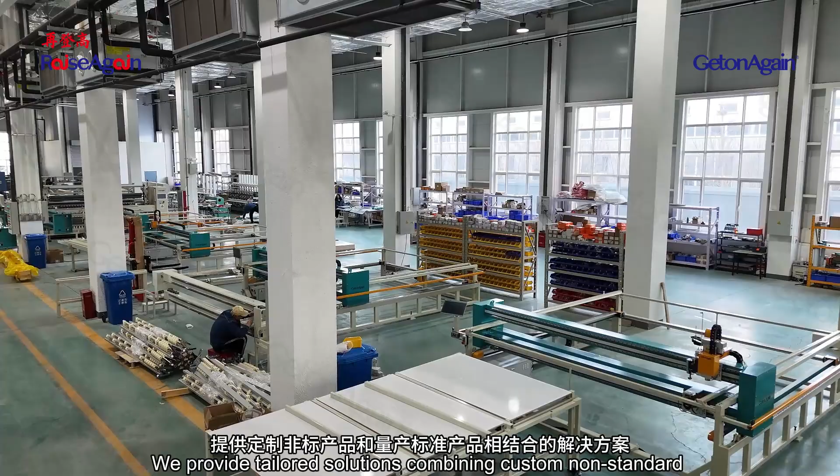We provide tailored solutions combining custom non-standard products with mass-produced standard products, including mechatronic machines, automated production lines, and intelligent factory solutions. Pattern room equipment includes magic inkjet plotter, 2 cartridge with maximum printing speed at 110 square meters per hour.

4 cartridge with maximum printing speed at 200 square meters per hour. Vertical inkjet cutting plotter, 1 machine multiple functions, pattern drawing with cutting, or standalone drawing. High-quality rotary cutting knife can cut minimum 80 grams per square meter paper for sample design, cost saving.

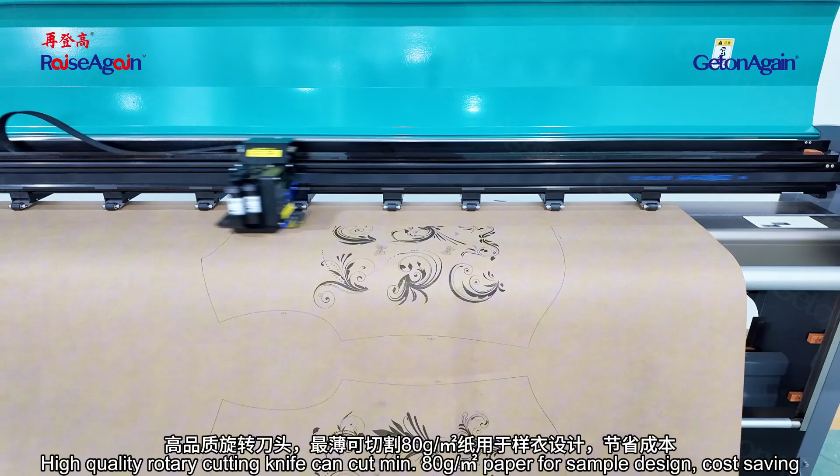Flatbed inkjet cutting plotter, both bitmap printing and cutting function, suitable for personalization, configured with long knife or short knife, and optional fixed knife sleeve or elastic knife sleeve, suitable for cutting various materials.

Digitizer, easily reading paper patterns, convenient positioning, simple operation, accurately reading patterns, enable to speed up the design. It is a powerful tool for traditional manual drawing digitization. Digitizer can be used in various fields, such as clothing industry, fashion design, surveying and mapping, mining, stamping and environmental protection, etc.

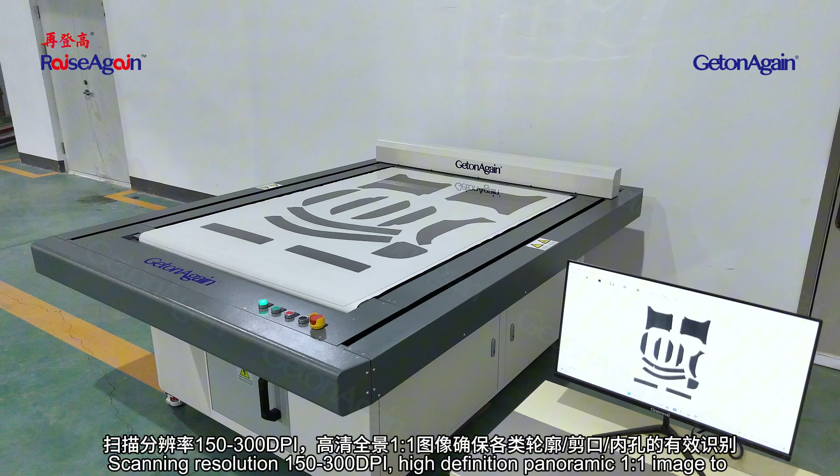Flatbed scanning digitizer. 1 button to start after placing scanning pieces. Can vacuum absorption auto scanning auto transmission. According to different models, support ultra-long width scanning. Scanning speed up to 7,200 mm/minute. Scanning resolution 150 to 300 dpi. High definition panoramic 1:1 image to ensure effective identification of various contours, notches, inner holes.

Cutting equipment includes automatic spreading machine. Easily set the spreading method, length, speed, quantity and sections, with intuitive as well as simple operation. Dual use for both knit and woven fabrics, suitable for t-shirts, children's clothing, loungewear, and toy textiles.

Automatic spreading machine, suitable for automatic fabric spreading of seats, bags, outdoor furniture and medical supplies, for working with heavy fabric roll. Smart cutting device. The intelligent adjustable cutting device allows for adjustable speed and distance, ensuring neat and stable cuts. Cutting unit and main unit can be quickly and easily detached or attached.

Fabric pre-relaxation device releases fabric tension in advance before spreading, eliminating spreading tension and maintaining consistency in spreading quality. Automatic edge alignment device ensures accurate automatic edge alignment during the spreading process, enhancing the quality of the spread fabric. Emergency stop device. Steel cables are installed on both sides of the cutting table, allowing for an emergency stop by pulling the cable from any position on the table, ensuring operational safety.

Easy to be operated by 1 person, effective spreading and smoothing. With servo system, auto tension adjustment for fabric. Edge alignment accuracy within 0.5 mm.

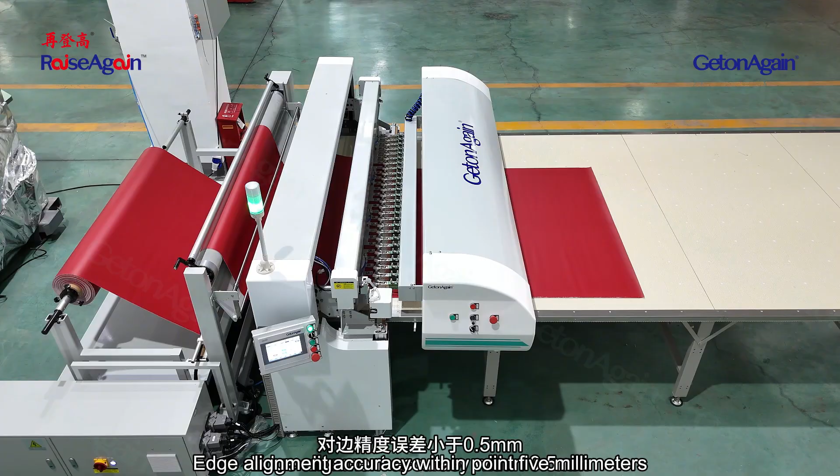Automatic spreading machine, 2 to 6 rolls, suitable for automatic fabric spreading of seats, bags, outdoor furniture and medical supplies. Fabric pre-relaxation device releases fabric tension in advance before spreading, eliminating spreading tension and maintaining consistency in spreading quality. Smart cutting device. The intelligent adjustable cutting device allows for adjustable speed and distance, ensuring neat and stable cuts. Cutting unit and main unit can be quickly and easily detached or attached.

Automatic edge alignment device ensures accurate automatic edge alignment during the spreading process, enhancing the quality of the spread fabric. Independent fabric rack, up to 6 rolls of fabric can be operated at the same time. Flexi spread device, flexible fabric clamping structure, simulating manual fabric clamping. Auto sensing fabric spreading tension, eliminating fabric curling problem due to excessive tension during spreading.

Automatic stop when material runs out. Automatically stops operation when the fabric is finished spreading and returns to its starting point.

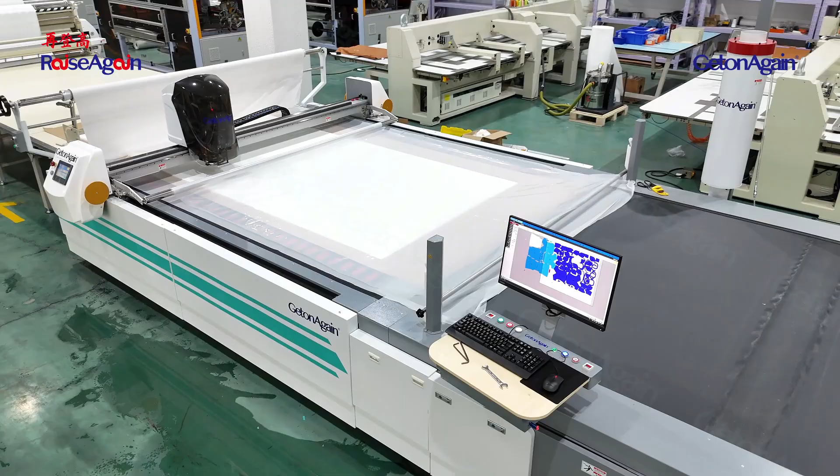Automatic multi-layer cutting machine. Through the combination of micron-level intelligent sensing components and an intelligent control system, dynamic compensation and correction of cutter deformation during cutting operations are achieved, significantly reducing errors between the top and bottom layers of fabric during cutting, enabling truly high-precision intelligent cutting.

Automatic single-layer cutting machine. No need to create specialized cutting molds. Cutting can be performed precisely by directly importing CAD design drawings into the equipment. Optimizes cutting paths, integrates repeated cutting lines, allows for pre-simulation of the cutting process, and supports continuous cutting for extra-long materials.

Stripe and plaid matching cutting machine, equipped with a few HD industrial cameras, according to the capture size to perform intelligent combination, ensuring high-accuracy fabric image capturing.

Stripe and plaid matching auto cutter, equipped with double knives and pen draw punching working mode, special for various stripes and plaids fabric cutting in single ply.

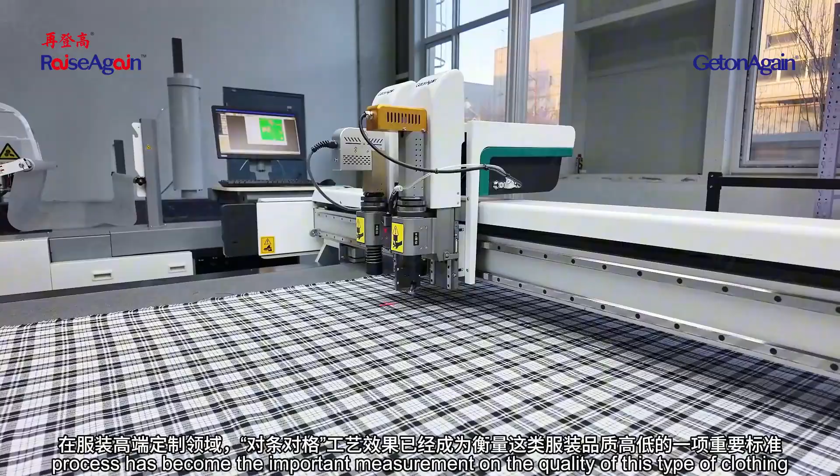High-end clothing customization. The effect of the alignment match stripe and plaid process has become an important measurement of the quality of this type of clothing. Stripe and plaid auto cutter is the equipment specially developed for this process to meet matching stripe and plaid clothing, suitable for single ply cutting.

Process of striped plaided fabrics.

Precision single head cap, tubular embroidery machine. Pattern rotation and proportional scaling. Patterns can be scaled up or down in 1% increments, ranging from 50% to 200%, and rotated in equal increments, with a rotation range from 0 degrees to 89 degrees.

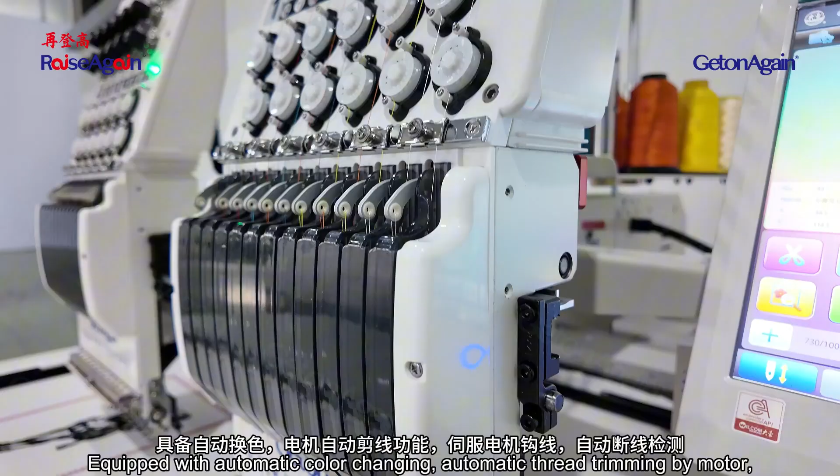Precision two-heads cap, tubular embroidery machine, equipped with automatic color changing, automatic thread trimming by motor, servo motor thread hooking, and automatic thread broken detection.

6-head flat embroidery machine, used for high-end customization of clothing, bags, shoes, hats, toys, and other products.

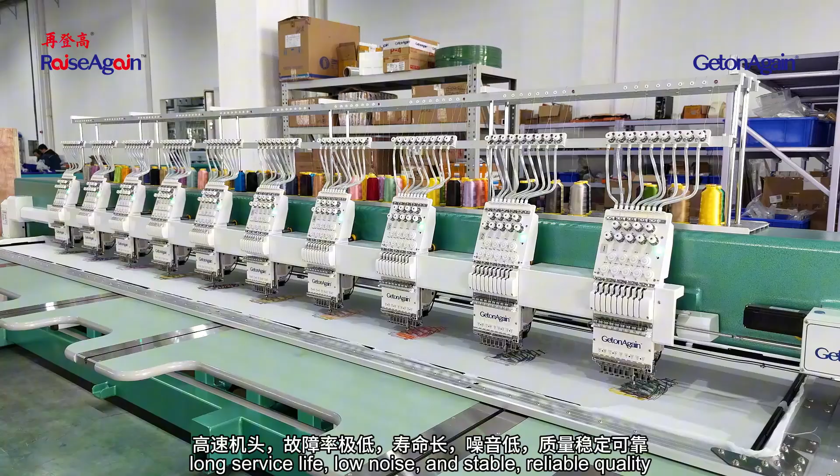Computerized embroidery machine: high-speed embroidery with extremely low failure rates, long service life, low noise, and stable, reliable quality. Equipped with an upper thread clamping device to prevent thread detachment and breakage, ensuring excellent embroidery results. Suitable for textile and garment manufacturing, footwear, hats, bags, home decoration, automotive interiors, and industrial products.

Embroidery equipment includes the Cloud Smart Teaching Embroidery Machine, suitable for integrated theoretical and practical teaching of computer embroidery in fields such as fashion and apparel design, clothing design and its engineering.

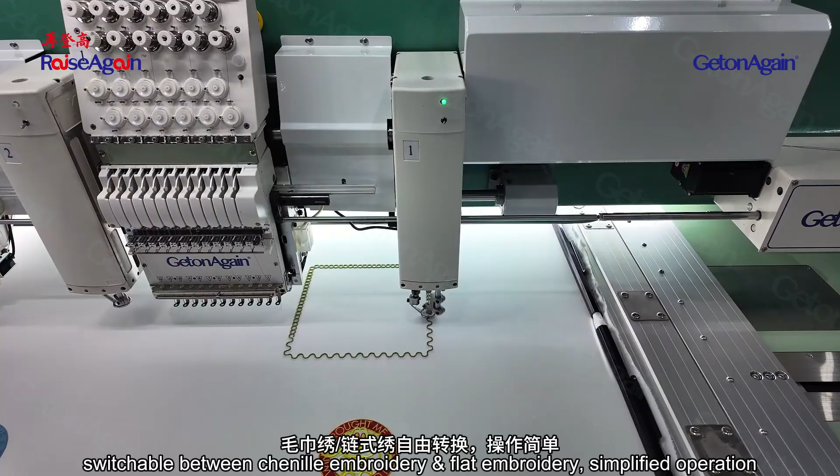Mixed chenille chain stitch embroidery machine. Mixed embroidery feature, according to color sequence settings, switchable between chenille embroidery and flat embroidery, simplifying operation. Chenille needle height can be adjusted in 10 levels according to chenille pile height or chain stitch thread thickness. Multifunctional embroidery on garments, shoes, caps, home textile, toys, bags and luggage, art craft, etc.

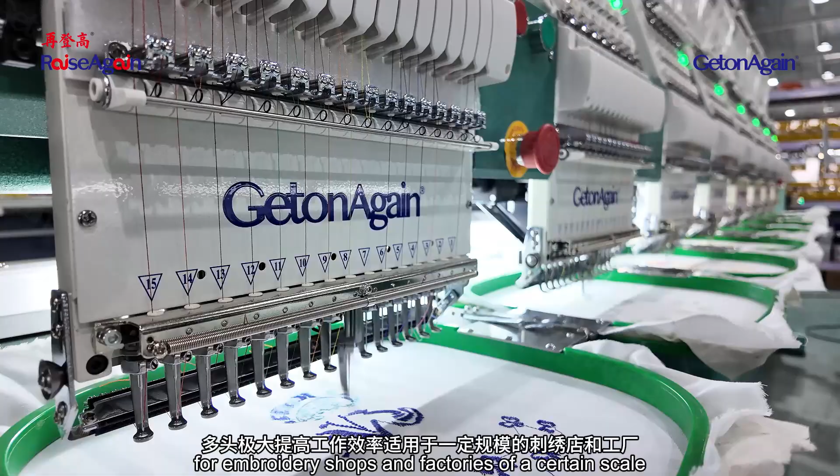Multi-head tubular embroidery machine, multi-head series, suitable for embroidering on flat items, caps, garments, shoes, belts, bags, etc. Auto thread trimmers, auto color change, auto thread break detection, 270 degree wide angle cap system, red light locating, LED lighting, precise head and drive system to ensure exquisite embroidery work, drop tables easy to lift up and down. Multiple heads greatly improve work efficiency, suitable for embroidery shops and factories of a certain scale.

Computerized 5-in-1 embroidery machine, integrating 5 functions in one machine: flat embroidery, coiling, cording embroidery, chenille, chain stitch embroidery, double sequin device, and laser cutting function. High precision, strong stereo sense, ideal artistic effect, suitable for embroidery of apparel, home textile, furniture, teaching, design and arts and crafts, etc.

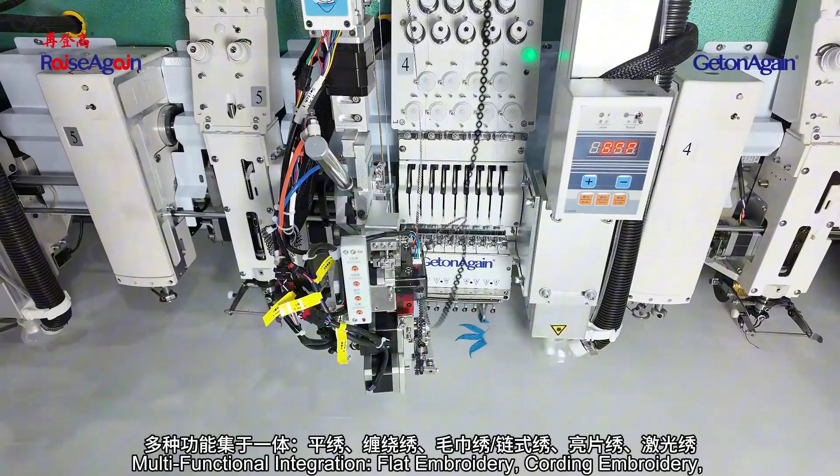Computerized mixed embroidery machine, multifunctional integration: flat embroidery, cording embroidery, chenille, chain stitch embroidery, sequin embroidery, and laser embroidery. Expandable options support additional modules such as laser processing. Fast switching between flat embroidery, coiling embroidery, or chenille embroidery, allowing you to choose any embroidery type as needed. Applications: suitable for embroidery on garments, home textiles, home decor, education areas, R&D and arts and crafts products.

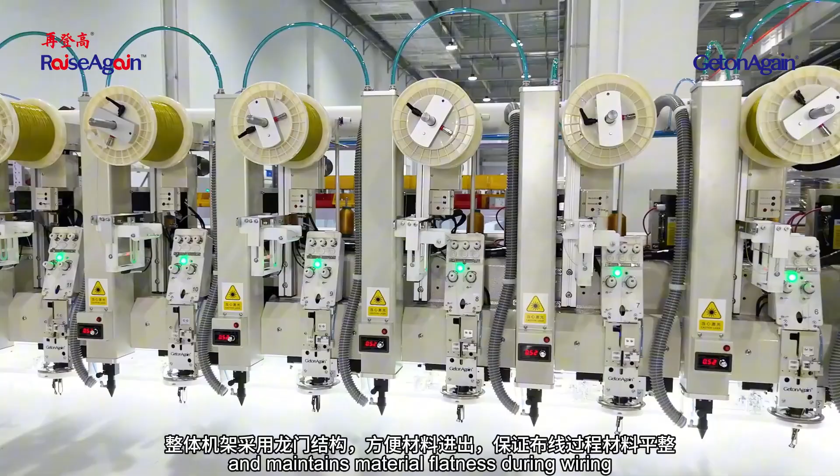Computerized wiring machine Model G. Gantry frame design ensures easy material loading, unloading, and maintains material flatness during wiring. Large spool device reduces heating wire replacement frequency during production. Automatic wire feeding device for resistance wire or other wires, with adjustable feed amount and feed fault alarms.

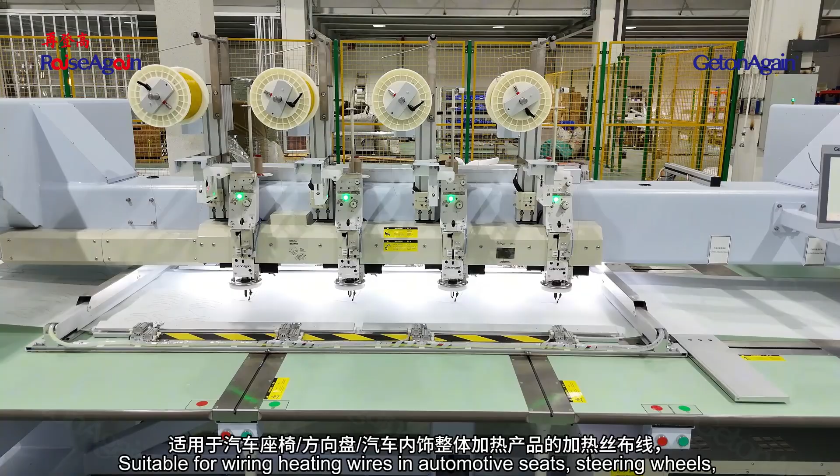Automatic product changeover. Raw fabric feeds in from one end. After wiring, the automatic take-up device pulls the material with adjustable lengths, reducing manual pulling time and labor. Pneumatic frame: program-controlled pneumatic components for automatic opening, closing, and tensioning. Firm clamping with adjustable stretching lengths within a specified range. Suitable for wiring heating wires in automotive seats, steering wheels, and complete interior heating products, also applicable for automotive hands-off detection hot product wiring.

Carbon fiber placement stitching machine. Suitable for the layup and stitching of carbon fiber materials in industries such as automotive, aerospace, and bicycle manufacturing. Enables precise features and independent feeding paths for carbon fiber, significantly reducing fiber abrasion and ensuring material integrity, enabling highly accurate stitching of carbon fiber fabrics.

Stitch width can be set according to different material specifications. The presser foot height can be set and automatically adjusted during the carbon fiber placement and stitching process to accommodate different material thicknesses.

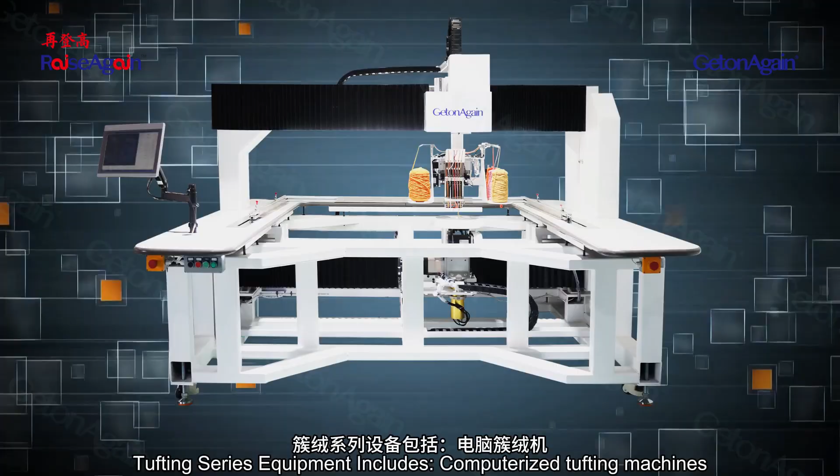Tufting series equipment includes computerized tufting machines with a rotary tufting head at any angle, avoiding positive-negative stitching difference for higher efficiency and better tufting results. Suitable for various rugs, carpets, hanging carpets, tapestry, etc., and other flooring decorative and home furnishing products tufting.

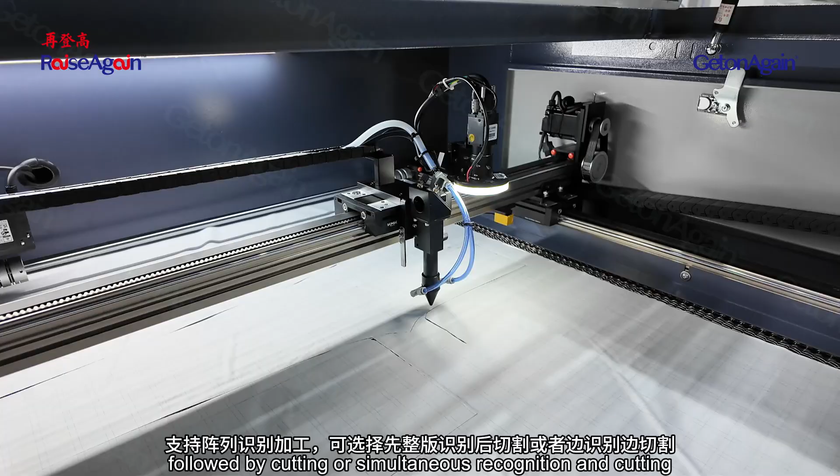Laser equipment includes small format camera positioning laser engraver cutting machine, supporting array recognition processing, with options for full sheet recognition followed by cutting, or simultaneous recognition and cutting. Features multi-template mixed cutting, allowing recognition and positioning of different patterns to be completed in a single operation.

Laser engraving and cutting machine. The cutting center can directly and seamlessly interface with software such as AutoCAD, CorelDRAW, AI, and Garment CAD, ensuring easy operation, high cutting precision, and fast cutting speed. Suitable for clothing, home textiles, furniture, luggage, toys, car interiors, shoemaking, and other industries for cutting and carving of non-metallic materials.

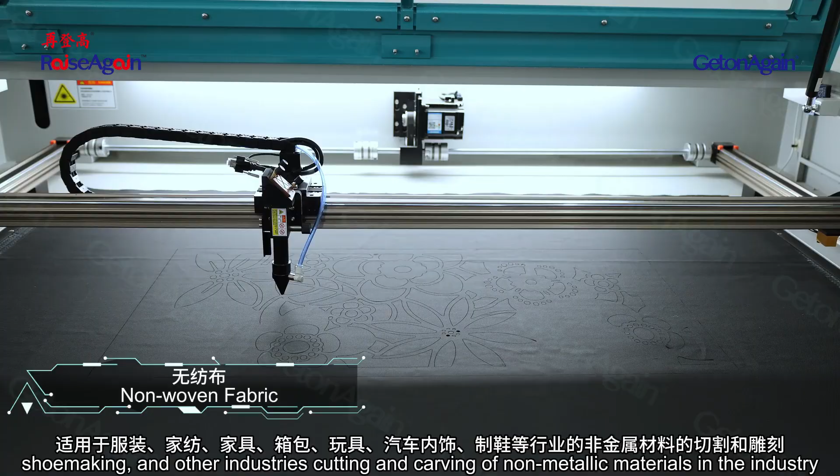Automatic feeding laser cutting machine, large format vision recognition plus auto receiving table. Advanced vision system with high resolution industrial camera captures real-time images of material patterns, accurately detecting outer contours to perform precise cuts, resolving issues such as distortion in printed or stretch fabrics.

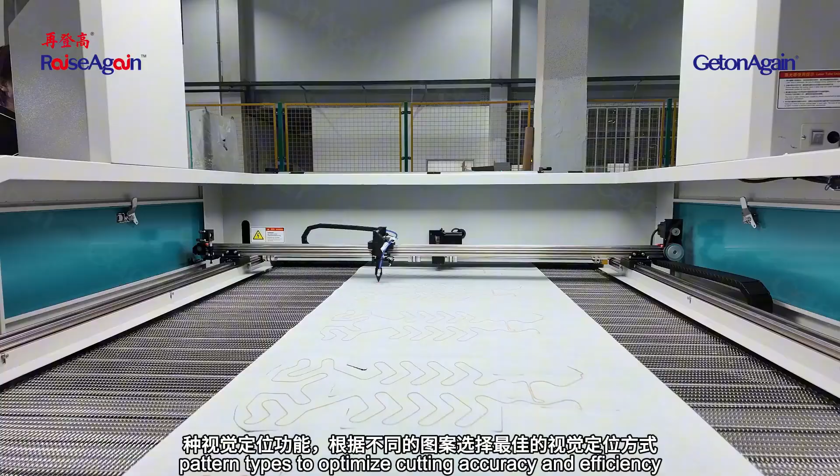Choose the most suitable positioning mode for different pattern types to optimize cutting accuracy and efficiency. Supports edge alignment and tension control to ensure smooth, wrinkle-free material feeding. Highly automated, ideal for continuous production. Designed for precise, high-efficiency cutting of flexible materials such as digitally printed fabrics, lace with pattern alignment and shaping cutting, and heating elements with positioning requirement.

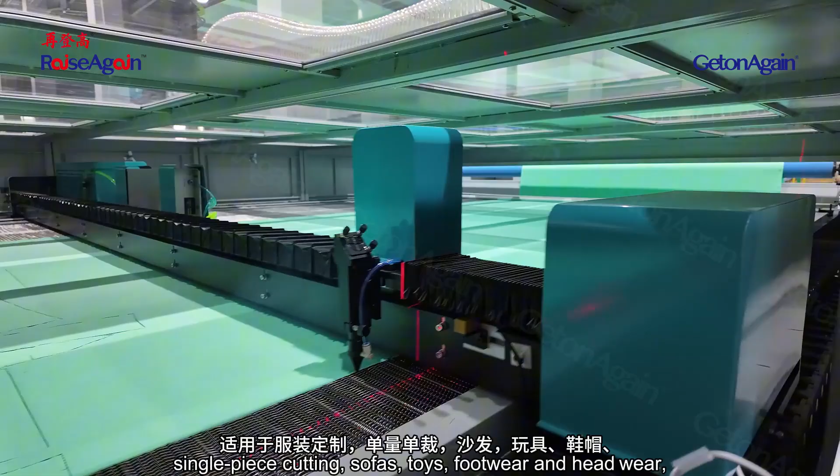Fully automatic large format laser cutting machine with inkjet device. Large format automatic feeding system, designed to meet the requirements for feeding and cutting whole rolls of fabric. Inkjet and cutting functions integrated for enhanced versatility. Applicable to industries such as custom clothing, single-piece cutting, sofas, toys, footwear and headwear, textile print pattern positioning cutting, automotive interiors, industrial filtration, and advertising, etc.

Sewing equipment includes automatic arbitrary rotary single-needle leather sewing machine, suitable for automated leather pattern sewing in the fields of automotive interiors, car seat covers, car door panels, airplane seats, and leather furniture upholstery. Brand new integrated sewing head design, simple and elegant overall appearance.

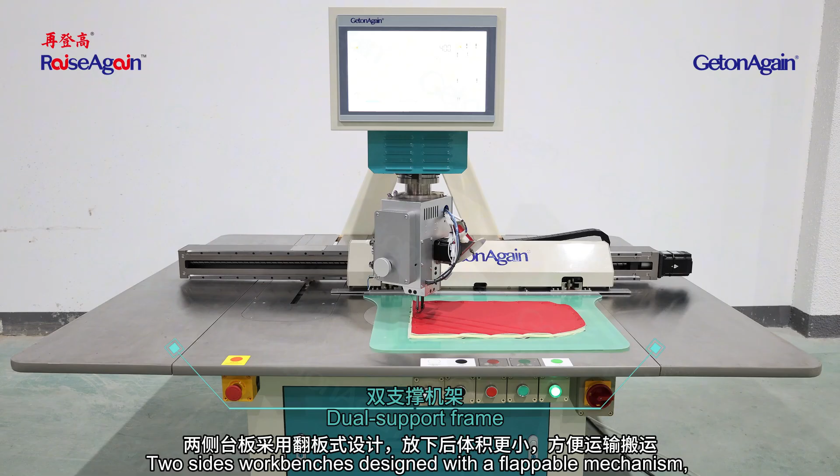15-inch HD industrial touch control screen. Two-side workbenches designed with a flappable mechanism, reducing size after folding for easier transportation. Sewing head can rotate at any angle, avoiding differences between forward and reverse stitches, improving sewing efficiency and stitch quality. Pneumatic lifting head structure with a stroke of 50 mm, making frame changes and span sewing more convenient.

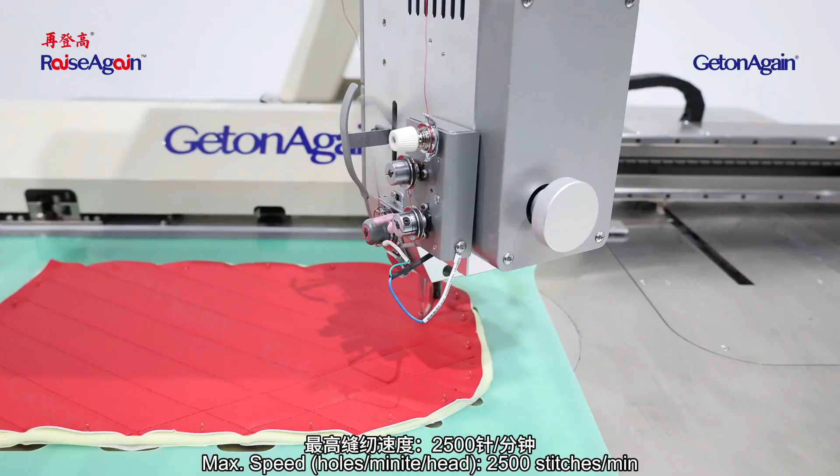The advantage of an independently driven presser foot system lies in its ability to control presser foot height through real-time pattern programming, effectively addressing uneven presser foot pressure issues when sewing materials of varying thicknesses. Newly upgraded triple lead screw drive for higher dynamic positioning accuracy. Max speed holes/minute/head, 2,500 stitches per minute.

Fully automatic 360 degrees template sewing machine with auto feeding. Ideal for automated sewing of thin, thick materials including quilted garments, down jackets, pillowcases, etc. Dual auto feeding system enhances efficiency and reduces operator fatigue.

Vertical head lift for easy template replacement and convenient step-over sewing. Reinforced casting body ensures consistent stitches even at high speeds, no head sinking. Smart functions include auto thread trimming, upper thread break detection, bobbin counter, USB pattern import, and top thread clamping.

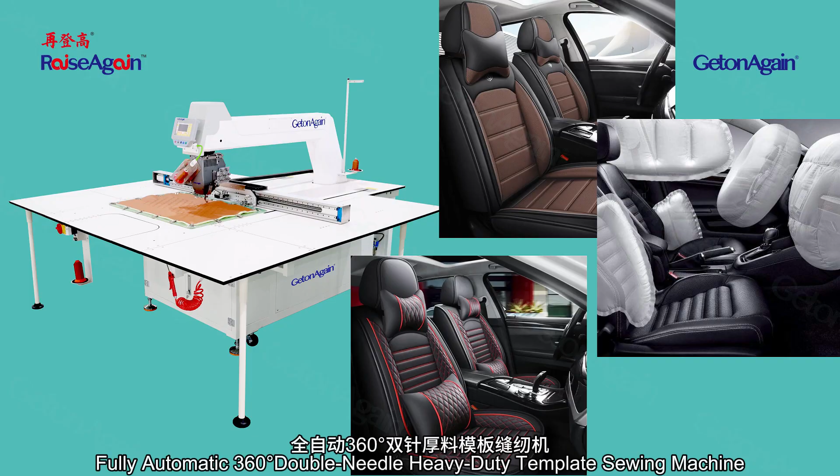Fully automatic 360° double needle heavy-duty template sewing machine, for automotive seats, automotive airbags, automotive interiors, home furnishings, and other double-thread heavy-duty sewing. Features include automatic thread trimming, emergency stop, thread breakage detection, bobbin thread counting, data input saving, and automatic adjustment of sewing direction. Fully servo motor control ensures high equipment stability and guarantees high-quality sewing results.

Mattress border pattern sewing machine. Pneumatic presser frame securely holds fabric in place for more beautiful stitching and allows for wide-range horizontal frame movement. Machine head with micro-oil head design ensures fabric remains free from all contamination during sewing. Pneumatic positioning device guarantees high-precision alignment at panel joints.

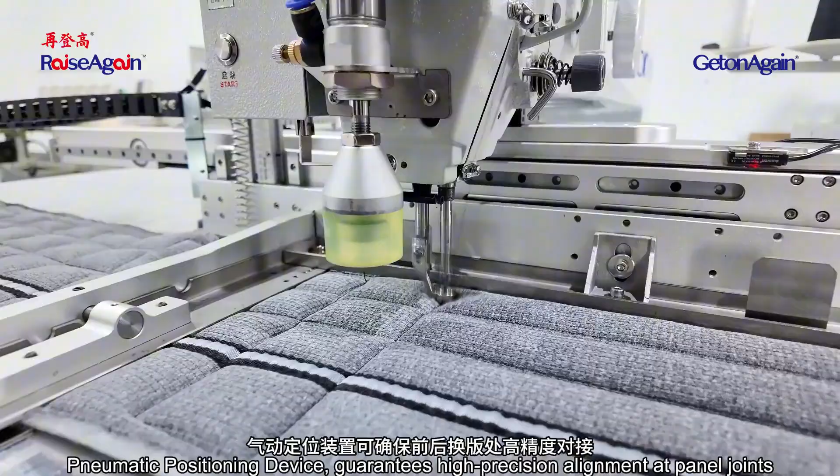Features automatic thread trimming, automatic material collection, and machine error alarm for ease of operation. Standard configuration with feeding and collecting racks for streamlined workflow. Advanced sewing technology for mattress side borders. Fully automatic perforation and sewing integrated machine.

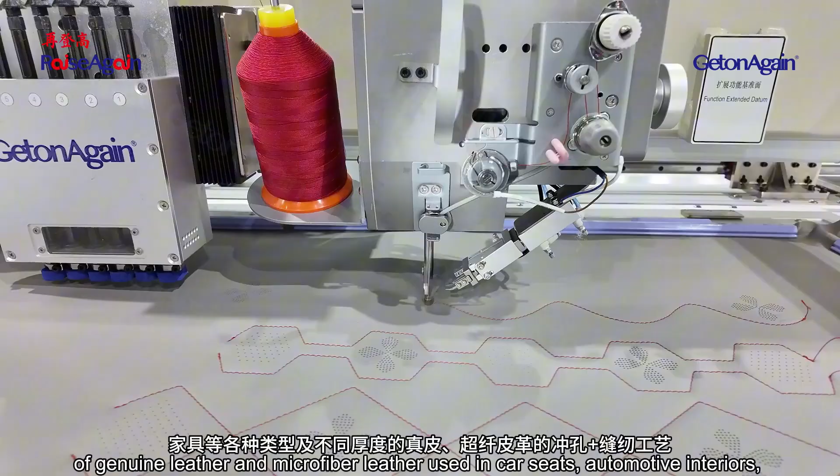Punching machine head is specifically designed and developed for leather materials, equipped with various round punching tools specifications. Sewing head up moving stroke is 50 mm, providing sufficient space for material loading and easy operation. Suitable for perforation and sewing processes of various types and thicknesses of genuine leather and microfiber leather used in car seats, automotive interiors, aircraft seats, luggage, furniture, and more.

Fully automatic embroidery and sewing integrated machine. 9-color embroidery machine head to meet the embroidery needs of different industries. The embroidery thread clamping mechanism incorporates a novel upper thread clamping assembly, effectively reducing thread breakage and slippage occurrences during operation. Specially designed sewing machine head for leather materials, producing beautiful stitching.

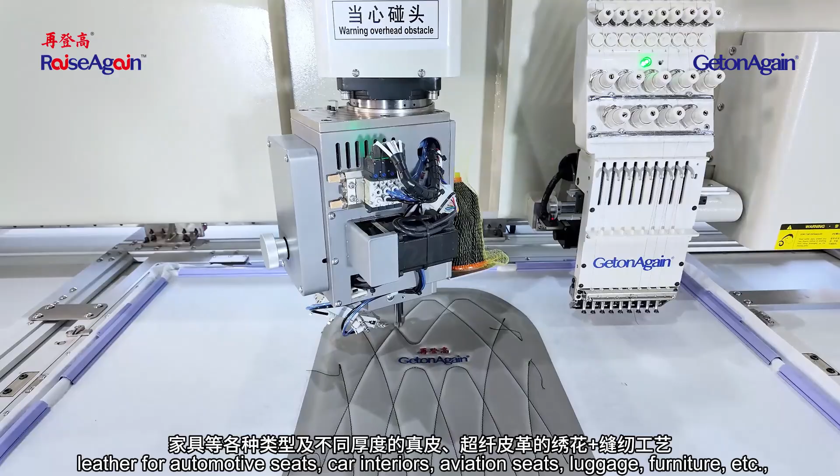Presser foot height is motor controlled and highly adjustable. Sewing machine head has up-down moving stroke of 50 mm, providing ample space for material loading and ease of operation. Suitable for various types and thicknesses of genuine leather and microfiber leather for automotive seats, car interiors, aviation seats, luggage, furniture, etc., combining embroidery and sewing processes.

Fully automatic perforation round hole and embroidery and sewing rotating head machine. Integrates punching, embroidery, and sewing into one machine, allowing for arbitrary patterns, design and seamless combinations of punching, embroidery, and sewing for complex processes. The 9-color embroidery head meets the embroidery needs of various industries.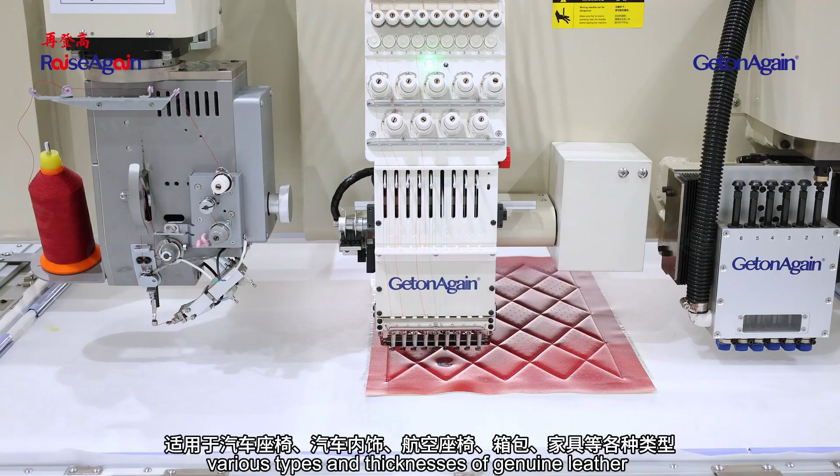Sewing machine head features an arbitrary rotation structure, creating beautiful stitching, reducing frame movement frequency, and improving efficiency. Suitable for punching, embroidering and sewing processes for various types and thicknesses of genuine leather and microfiber leather used in automotive seats, car interiors, aviation seats, luggage and furniture, etc.

Fully automatic round perforation and 9-color embroidery and fixed head sewing machine, Super M. Integrates punching, embroidery, and sewing into one machine, allowing for arbitrary pattern, design and seamless combinations of punching, embroidery, and sewing for complex processes. The 9-color embroidery head meets the embroidery needs of various industries.

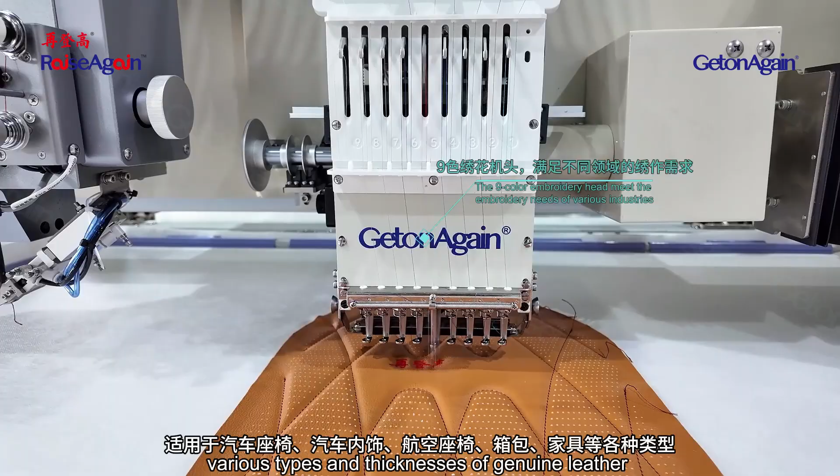Sewing machine head features an arbitrary rotation structure, creating beautiful stitching, reducing frame movement frequency, and improving efficiency. Suitable for punching, embroidering and sewing processes for various types and thicknesses of genuine leather and microfiber leather used in automotive seats, car interiors, aviation seats, luggage and furniture, etc.

Fully automatic perforation special hole and embroidery and sewing rotating head machine. Integrates punching, embroidery, and sewing into one machine, allowing for arbitrary pattern, design and seamless combinations of punching, embroidery, and sewing for complex processes. Specially developed punching machine head for leather materials. The 9-color embroidery head meets the embroidery needs of various industries.

Sewing machine head features an arbitrary rotation structure, creating beautiful stitching, reducing frame movement frequency, and improving efficiency. Suitable for punching and embroidering and sewing processes for various types and thicknesses of genuine leather and microfiber leather used in automotive seats, car interiors, aviation seats, luggage and furniture, etc.

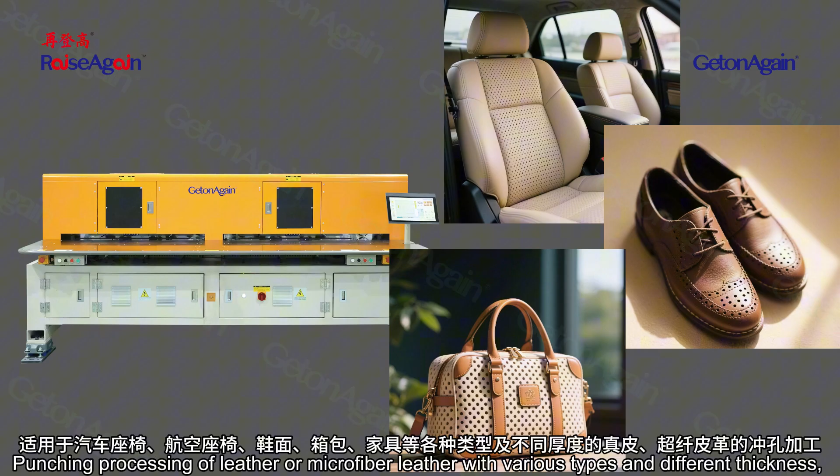Automatic high-speed leather perforating machine for punching processing of leather or microfiber leather with various types and different thickness, such as car seats, aviation seats, shoes, bags and furniture, etc. Full-scale 3-dimensional protective design ensures safer operation. The punch toolbox is tightened to prolong the punch tool's spring service life and reduce part wear.

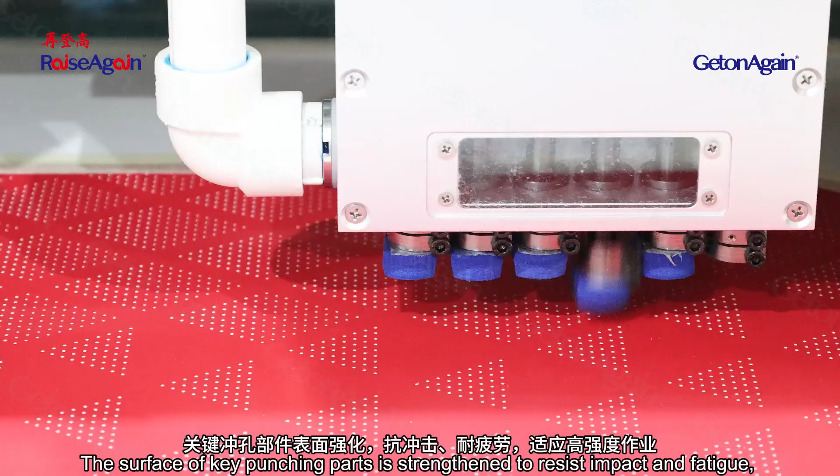The XY axis uses a ball screw direct drive for high-precision punching. The surface of key punching parts is strengthened to resist impact and fatigue, meeting the needs of high-intensity work. Single-head machines can make up to 2000 holes per minute, and double-head ones up to 4000.

Automatic template sewing machine, rotary head, heavy material. Both the X and the Y axis use a screw and slide transmission method, providing high precision and good stability. Suitable for pattern sewing on leather and heavy materials, such as car seats, sofas, massage chairs, coach interiors, and aircraft seats. The machine head can rotate freely to ensure the quality of the sewing stitches.

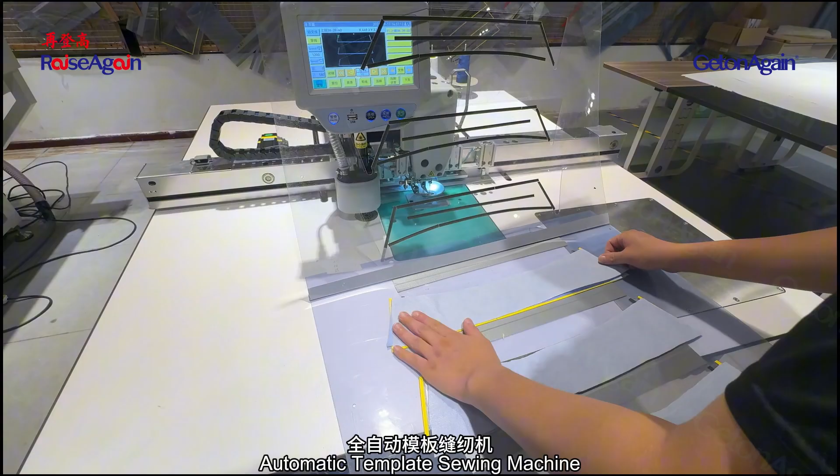Automatic template sewing machine. Double belt, double guide rail, double stepper motor structure. The machine head adopts oil-free lubrication, and the rotary shuttle adopts oil-line lubrication technology to completely eliminate fabric pollution. Identify patterns through RFID barcodes and automatically switch to the corresponding sewing program for quick sewing. Used for template sewing processes such as opening pockets, notches, bag covers, collar trimming, etc.

Pattern sewing machine. This machine can easily sew 1200D thick thread with a thickness of 12 mm, 2 times large rotary hook, automatic thread trimming, and the maximum sewing speed can reach 2500 RPM.

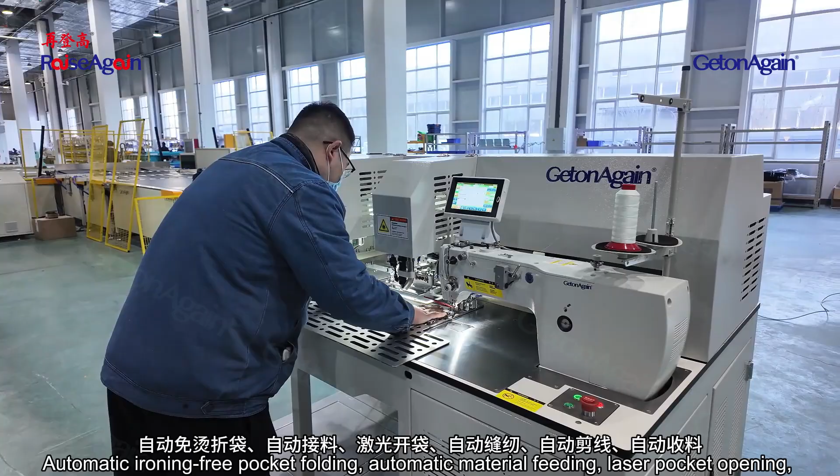Automatic laser pocket opening machine. Automatic ironing-free pocket folding, automatic material feeding, laser pocket opening, automatic sewing, automatic thread trimming, and automatic material collection. Front and back pockets for men's and women's clothing. Suits, inner and outer pockets of jackets, dress pants, hoodies, sun protection clothing, school uniforms, sportswear, cotton padded jackets, down jackets, workwear, jackets, uniforms, trench coats, cashmere coats, and plackets for polo shirts.

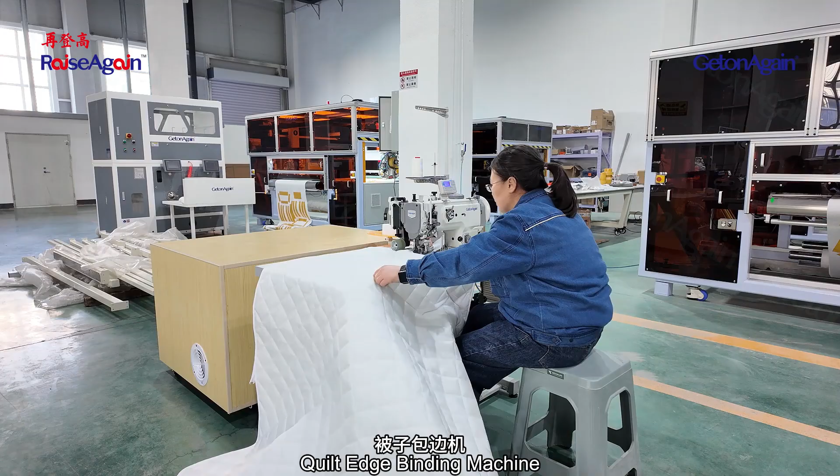Quilt edge binding machine. Features single needle compound feed, achieving cutting, binding, and sewing in one seamless operation. Enlarged right side waste discharge port with pneumatic waste discharge assistance ensures smoother disposal of waste generated during edge cutting. Special synchronized feeding structure, including alternating presser foot, needle, feed dog, and binding attachment, ensures no wrinkles or misalignment during straight line or corner sewing for a flawless binding effect.

Designed for edge binding processes of quilts such as cotton quilts, summer quilts, spring and autumn quilts, and other bedding items. Quilts, mattress binding with pulling sewing workstation. Equipment factory standard provides air floating table and automatic pulling device. Makes sewing worker operation easier and smoother.

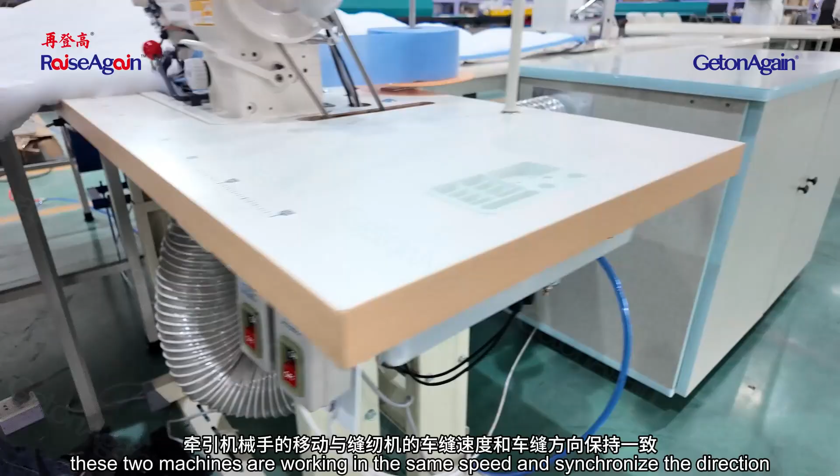Equipped with PLC control pulling device and synchronized with sewing machine electronic control. These two machines are working in the same speed and synchronize the direction. Optional automatic storage and vacuuming device to improve efficiency, reduce dust emissions, and provide the sewing operator a clean and tidy working environment. Binding result is rich with a strong solid feel. Corners are smooth and nice. Evenly stitched lengths, no hairy edge, no edge folding, no corner raising, etc.

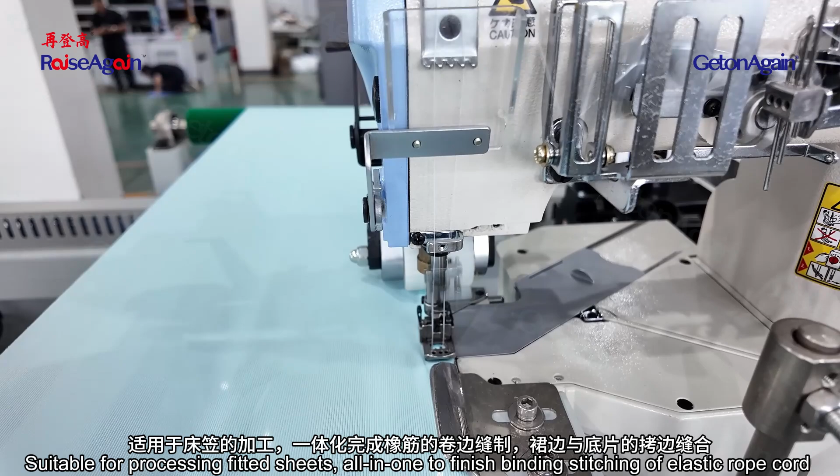Automatic mattress protector skirting sewing machine, interlock and overlock. Upper head with Pegasus interlock sewing. Lower head with Pegasus overlocking machine overlock stitches. High speed and stable performance. Suitable for processing fitted sheets. All-in-one to finish binding stitching of elastic rope cord and bed skirt, and the overlocking of bed skirt to mattress protector topper layer.

Automatic mattress protector skirting sewing machine, edge overlock. Upper and lower head with Pegasus overlocking machine overlock stitches. High speed and stable performance. The upper and lower workpieces work synchronously. Integrates the sewing of rubber band, banding and the sewing of bed skirt to the mattress protector layer, all finished in one.

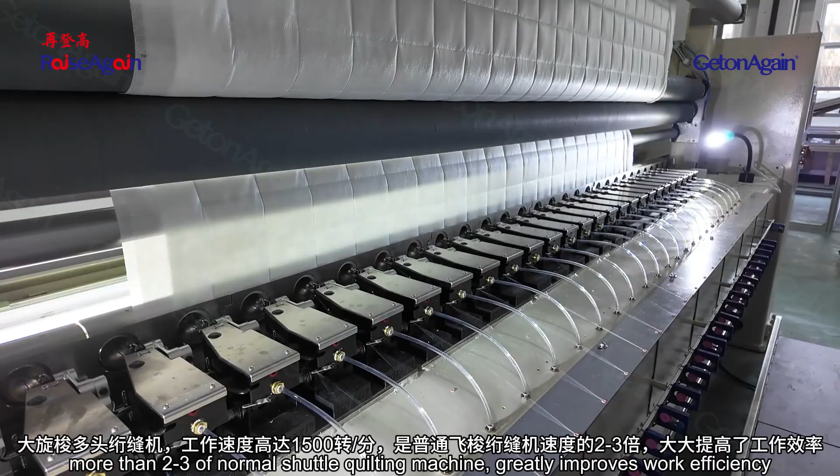Quilting equipment includes computerized multi-head rotary hook quilting machine model and double row lock stitch multi-head quilter with large rotary hook. Max speed of 1500 RPM, more than 2 to 3 times of normal shuttle quilting machine. Greatly improves work efficiency. 3-fold capacity rotary hook, less bobbin changing frequency. Beautiful stitches, no lost stitch, no thread loops.

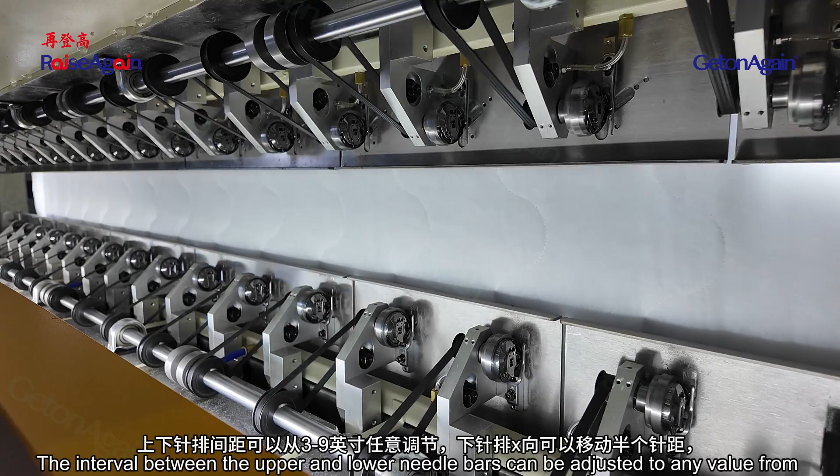Computerized multi-head rotary hook quilting machine model E, 5-time jumbo rotary hook, less bobbin changing frequency. Beautiful stitches, no lost stitch, no thread loops. The interval between the upper and lower needle bars can be adjusted to any value from 3 to 9 inches. The lower needle bar can move half a needle pitch in the X direction, so that quilting needle bars of different sizes and patterns can be combined, especially for some non-standard size patterns, which can achieve a unique effect.

Computerized multi-needle shuttle quilting machine, flying shuttle, for quilting of fitted sheets, bed covers, summer quilts and clothing products with quilting pattern. Computerized multi-needle chain-stitch quilting machine. Servo motor-driven rollers and lead screws ensure precise quilting patterns, suitable for mattresses, mattress covers, sofas, bedding, home textiles and home decor.

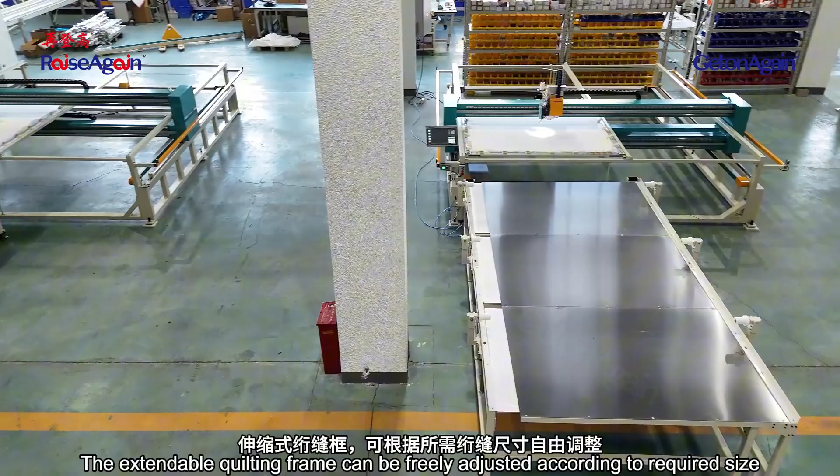Computerized single-needle quilting machine, lifting head. The extendable quilting frame can be freely adjusted according to required size. Quilting head with independent presser foot drive, suitable for various materials with different thickness. Full servo motor control, providing powerful and accurate driving force. Automatic lifting head, easily change the frame after finishing quilting. Quick frame changer optional. Quilting process for home textile products such as quilts, comforters, mattress protectors, blankets, sleeping bags, single needle art quilts, etc.

Computerized single head quilting machine, frame type, belt support. High precision process stand ensures stable needle-hook clearance and longer service lifetime of rotary hook. Extendable quilting frame, able to adjust the desirable size of quilting freely. Specially designed quilting head, presser foot with individual driving, suitable for quilting material of various thickness. Full servo motor control, providing powerful and accurate driving force, greatly improved quilting precision. Automatic thread broken detection function. The machine will stop after thread breaks.

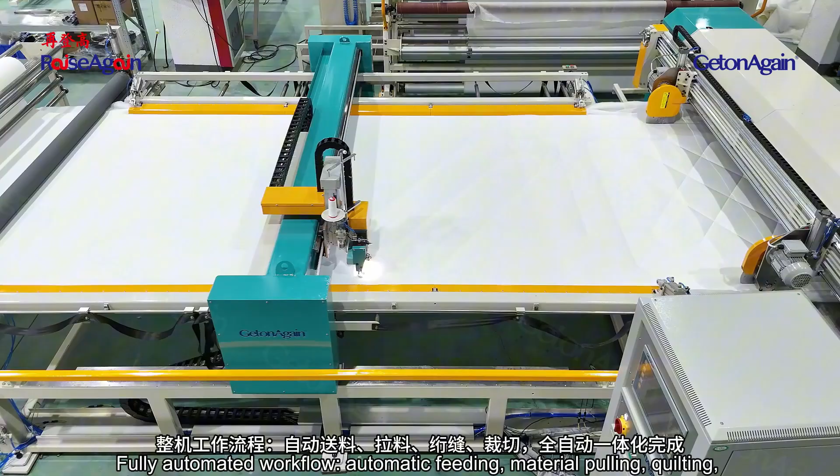Optional automatic bobbin changer. It is suitable for large area quilting and high-quality pattern products, such as furniture upholstery, sofas, headboards, soft beds, conference enclosures, or products with heavier materials, such as gravity quilts, etc. Continuous feeding gantry type single needle quilting machine. Suitable for single needle automatic quilting of mattresses, duvets, blankets, mattress protectors, upholstered furniture, and similar products. Fully automated workflow: automatic feeding, material pulling, quilting, and cutting, all completed in one integrated process.

Continuous feeding gantry type single needle quilting machine, double saddle model. Double saddle frame design allows simultaneous quilting of two pieces, doubling quilting efficiency. Specially designed lift type quilting head with a lifting height up to 150 mm, suitable for quilting materials of various thicknesses, maximum speed of 3000 revolutions per minute.

Rotary head precision sewing machine, baffle box duvet, suitable for the sewing of baffle box duvets, sewn-through duvets, baffle sleeping bags, and sewn-through sleeping bags, among other home textile products. Sewing head and rotary hook assembly can achieve precise, synchronous rotation at any spatial angle, ensuring the bobbin always remains perpendicular to the stitching direction for consistently positive sewing.

X and Y track axes use high-precision ball screw and linear guide structures to ensure stability and accuracy during high-speed or high-strength operation. Precision stepper motor ensures tape feeding is perfectly synchronized with needle movement, with adjustable feeding speed and automatic cutting to preset lengths. High-speed liftable sewing head with a maximum lifting height of 100 mm to accommodate products of varying thicknesses. Can be quickly switched: sewn through, fill then sew, sew then fill.

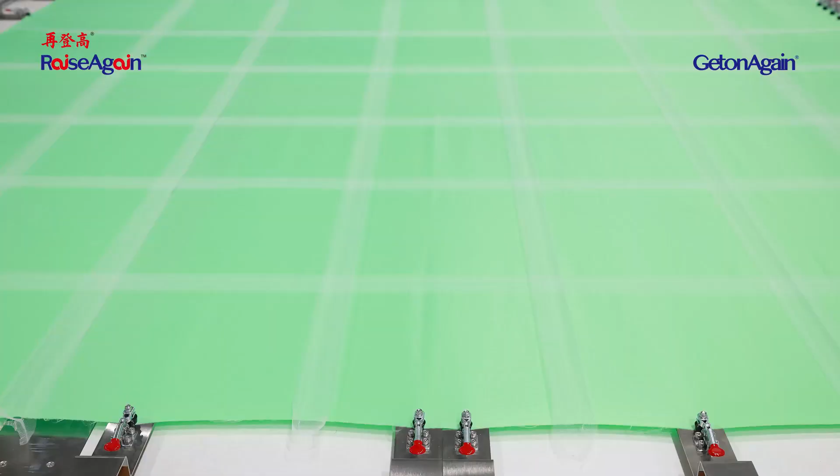Computerized single color single row quilting and embroidery machine model A. Summer quilts, bedspreads, mattress protectors, pillowcases, blankets, garments, car seat covers, car floor mats and furniture upholstery, etc. Equipped with a new high-speed double needle quilting and embroidery machine head with surface coating treatment for parts. Maximum speed 1000 RPM. Recommended operating speed 750 to 850 RPM.

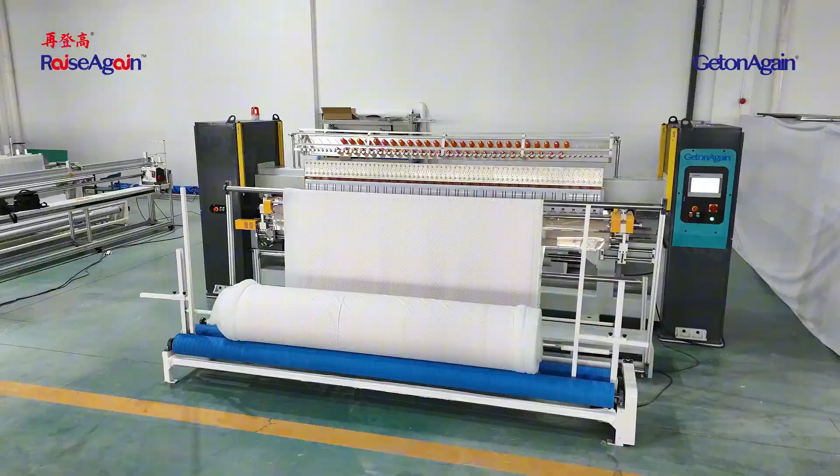Ultrasonic equipment includes ultrasonic slitting machine, adopting ultrasonic cutting technology, ensures smooth cutting edges, precision edge cutting, no deformation, fray free, no fiber pull, and no edge curling problem after cutting. Cutting rollers and patterns can be customized to meet various needs.

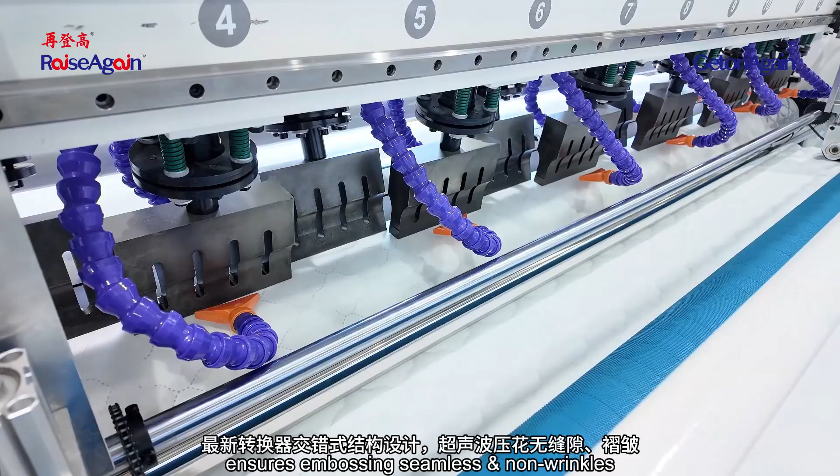Automatic ultrasonic quilting machine, integrating ultrasonic sewing and ultrasonic edge sealing and cutting automation into one, completing the process in a single step. The latest structure design with interleaved transducers ensures embossing seamless, non-wrinkled. After quilting, it can be connected with cutting machine to the finished product, or connected with rewinding device to the fabric rolls. Ultrasonic quilting machine to bond multi-layer of polyester fabric, non-woven fabric, polyester wadding, or artificial leather, etc., and emboss different patterns on it. Patterns are clear and beautiful, and fabric doesn't deform, with strong bonding and high efficiency.

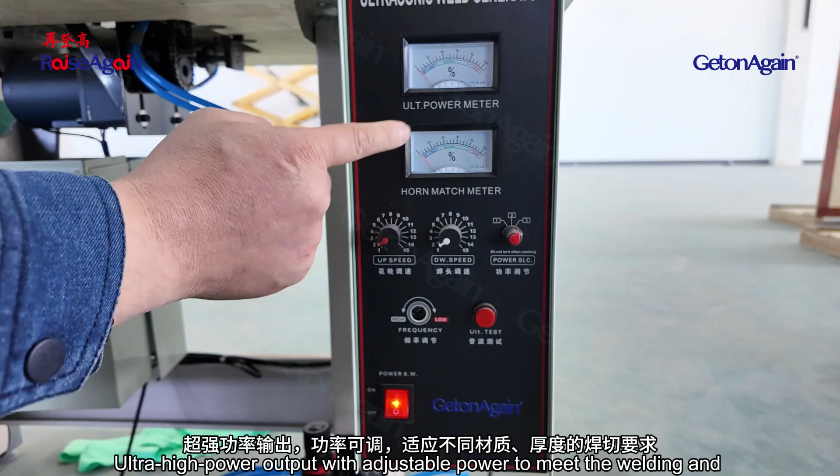Ultrasonic lace machine. Ultra-high power output with adjustable power to meet the welding and cutting requirements of different materials and thicknesses. Mold size from 23 to 60 mm. Mold lifting system with options for manual or pneumatic operation. Stripping: simultaneous single or multi-strip cutting with edge melting treatment for clean, burr-free edges. Pattern molds and welding pads undergo special hardness treatment for higher wear resistance. Various patterns can be customized as needed.

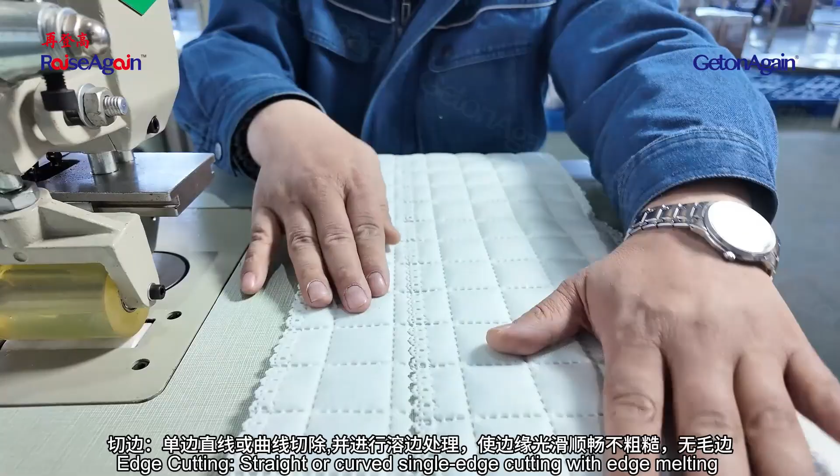Cut work: cuts various patterned holes with edge melting treatment. High running speed and simple operation. Bonding: seamlessly fusing two or more layers of fabric together without thread or needles, ensuring strong welding strength. Forming, cutting, bonding, and embossing. Edge cutting: straight or curved single edge cutting with edge melting treatment to ensure smooth, neat, and burr-free edges. Suitable for lace, decorative ribbons, home textile products, umbrella lace, tablecloths, automotive interiors, non-woven shopping bags, carbon bags, eyeglass cloth, etc.

Visual recognition and inspection equipment includes cut piece visual inspection instruments. After manual placement, one-click start allows for automatic scanning, automatic inspection of cut pieces, and automatic data storage. Scanning speed can reach up to 120 mm per second, with no need for additional lighting, ensuring reliable use in all weather conditions. Scanning resolution is 150 to 300 dpi, and the high-definition panoramic one-to-one image ensures that the inner-outer contours of the cut pieces are clearly visible.

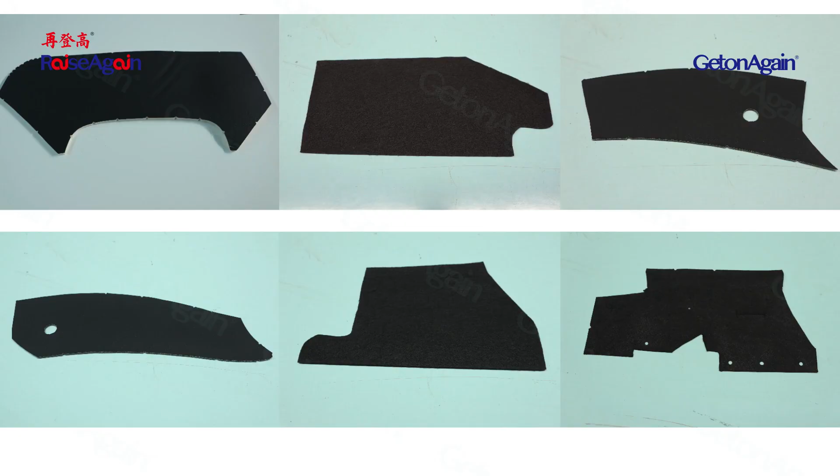Automated production line series includes multi-needle quilting machine, flying shuttle and cutting machine, and 4-side tape binding machine production line. Multi-needle quilting machine. The raw materials are quilted and fixed. Lock stitches, mainly used to process quilt cores and cushions. Cutting machine. Cut the quilted semi-finished materials, including trimming, fixed length cutting, slitting and rolling, and other functions.

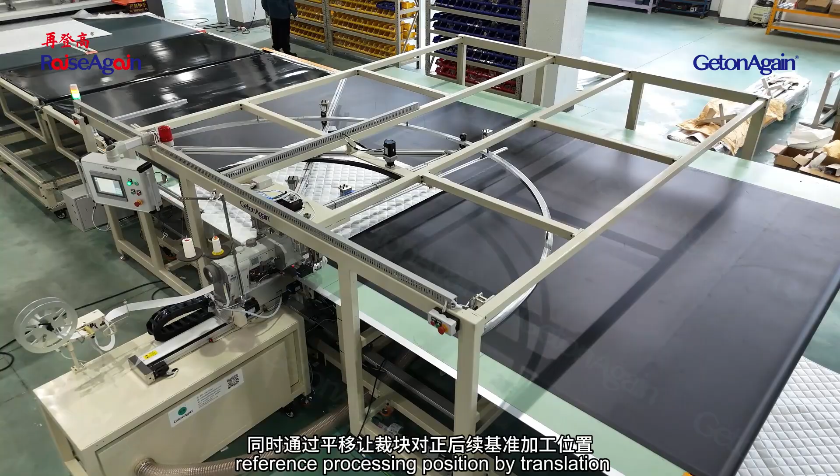Alignment platform. Material transfer alignment mechanism. The cutting block waits to enter the next sequence on this platform, and at the same time, the cutting block is aligned with the subsequent reference processing position by translation. Automatic tape binding machine. The cutting piece is processed by the tape binding machine to make the edge of the cut piece beautiful. The machine rounded corner tape binding process. The cutting and tape binding are integrated, and all actions are completed automatically.

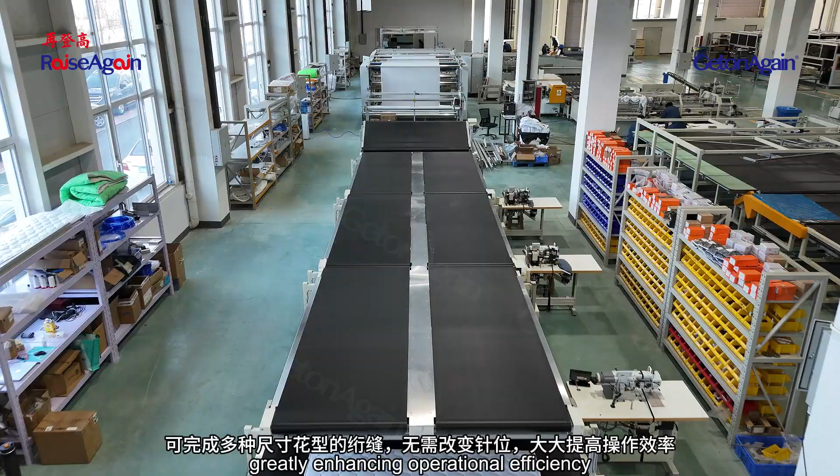Computerized multi-head rotary hook quilting machine and 4-side edge sewing machine, capable of quilting patterns in various sizes without changing needle positions, greatly enhancing operational efficiency. Double row machine with lower needles row can move half of the head distance in X direction, creating combination patterns of different sizes when coordinated with the upper needles. Longitudinal sewing, double chain stitch, optional lock stitch or overlock stitch. Transversal sewing, multi-needle chain stitch sewing. Transversal cutting between the 4 stitches, cutting as per set length and feeding to next sequence.

Automatic blanket straight corner binding machine, capable of holding 2 rolls of fabric non-elastic, equipped with edge alignment function, automatically pull and cut into panels. Pulling lengths can be set freely. 4-side tape binding sewing process for inelastic blankets.

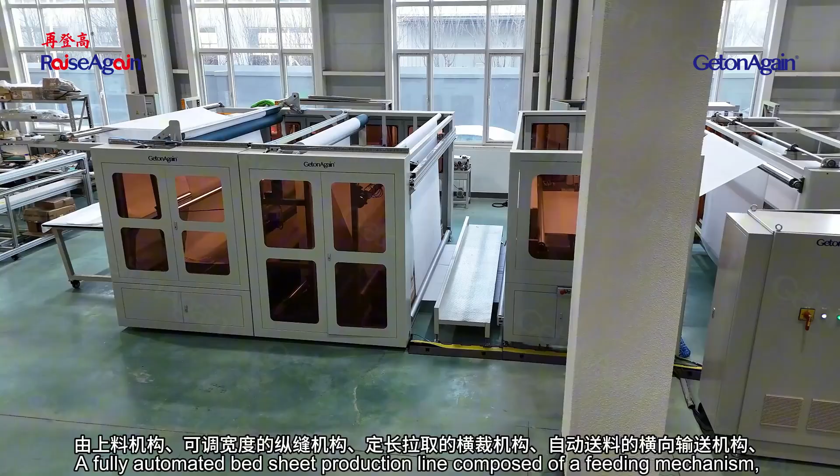Automatic bed sheet production line. A fully automated bed sheet production line composed of a feeding mechanism, an adjustable longitudinal sewing mechanism, a fixed length transverse cutting mechanism, an automatic transverse conveying mechanism, an automatic hemming transverse seam mechanism, and a discharging mechanism. Automatic bed sheet two side hemming machine. Suitable for continuous double-sided hemming and cutting of fabrics in home textile products manufacturing, such as bed sheets, flat sheets, and curtains. Supports both rolled and flat fabric feeding methods.

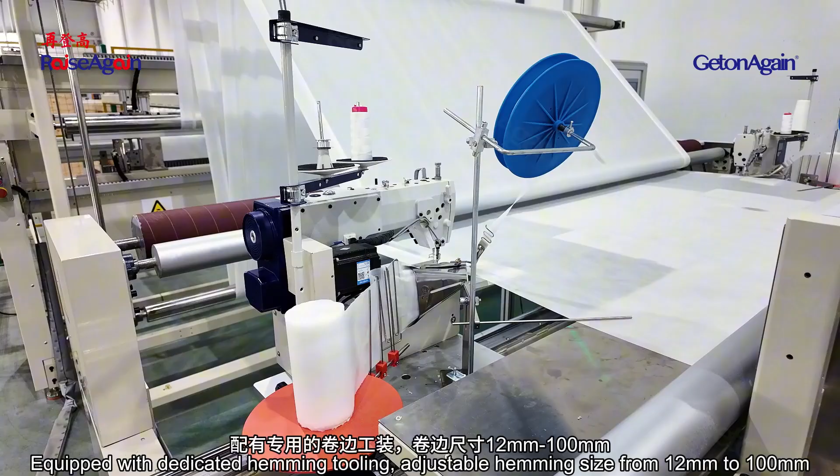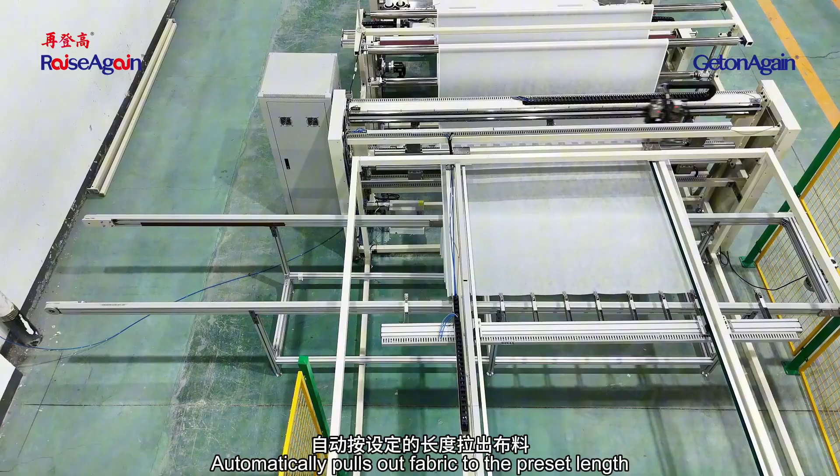Standard features include material shortage detection, automatic edge correction, and edge trimming. Equipped with dedicated hemming tooling, adjustable hemming size from 12 mm to 100 mm. Comprises a movable longitudinal sewing head with lock stitch optional. Automatic bobbin changer available and hemming attachments. Chain stitch sewing head is also available based on process requirements. Rotary blade mechanism for automatic fabric cutting. Optional, ultrasonic edge sealing is available. Automatically pulls out fabric to the preset length. After stacking the preset quantity of bed sheets, machine conveys them laterally for discharge.

Automatic vacuum pillow filling production line. This production line is suitable for loosening and weighing filling polyester short fiber raw materials greater than 0.7D into products such as pillows, cushions, back cushions, and sofa pads. Fully automatic one-button start, precise weighing filling, simple operation, and uniform filling. PLC program control, automatic cotton feeding, negative pressure cotton filling, and automatic clamping tools for bagging.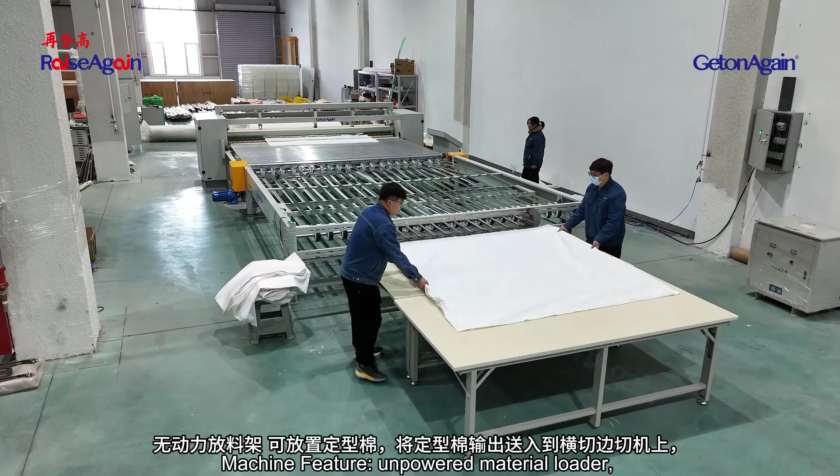Raw fiber panel cutting case filling line, edge trimming, length counting, cutting for polyfiber, thermal bonded wadding, chemical bonded wadding. Machine feature, unpowered material loader, can pass bonded wadding to the panel cutter machine. Equipped bearing seats on each roller, labor saving and energy saving. Electric flyover automatic cross cutting. 2 sets of longitudinal hard cutting blades can be increased or decreased according to product requirement. Automatically feeding the wadding fibers into the comforter envelope case after cutting off. Length set is controlled by computer and could set any value according to requirement.

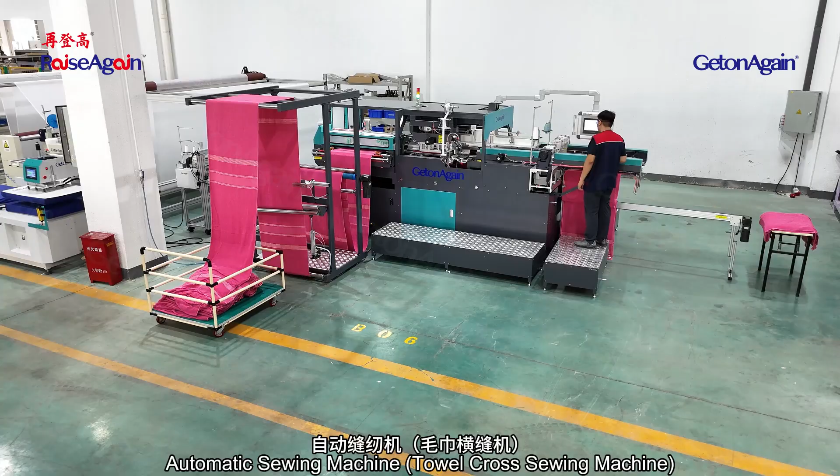Automatic towel cross sewing machine. Intelligent control, one touch start. One operator can control multiple units, reducing labor intensity. Automatic fabric alignment, equipped with a feeding and alignment mechanism to effectively correct fabric skew and ensure precise positioning. Rear sweeping and pressing device ensure towels are laid flat and fixed in position for stacking or subsequent processing. Preset length cutting mechanism, adjustable cutting length to meet various production needs.

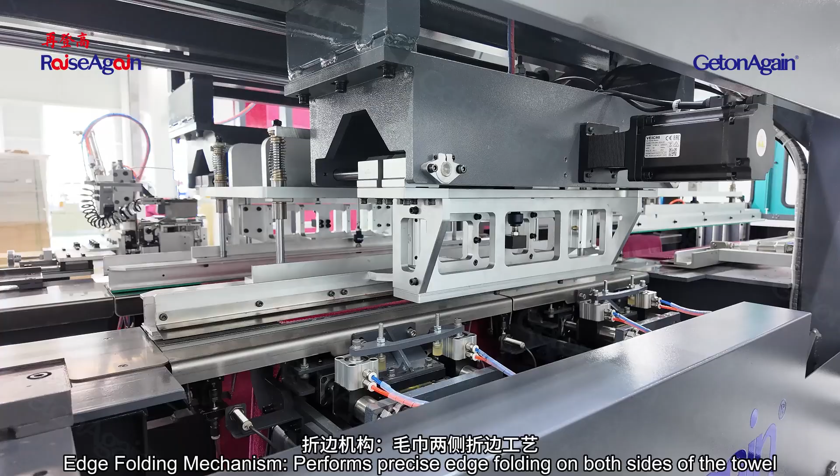Edge folding mechanism, performs precise edge folding on both sides of the towel. Automatic labeling, supports both single and folded labels with automatic feeding and code cutting. Equipped with towel detection, automatically detects whether towels are woven with suitable lengths, the joint seams between towels, etc. All those can be detected. Sewing mechanism, international brand sewing head ensures beautiful and consistent stitching. Edge folding and sewing of unfinished and non-elastic towels.

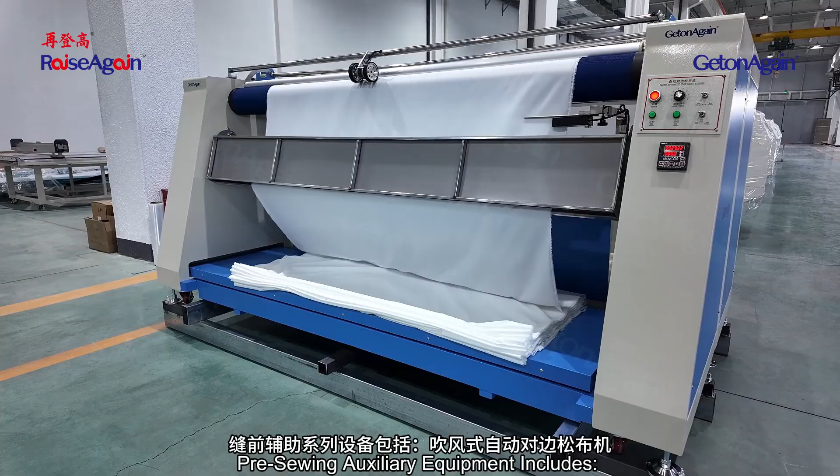Pre-sewing auxiliary equipment includes automatic edge alignment, relaxing machine, air blowing, roll fabric unmounted and folded as flat fold state. To achieve tension-free fabric placing, a wave-type air blowing device is used. In the loosening fabric process, fabric is relaxed by the blowing device.

Automatic marking machine: one-click start, intelligent grabbing, one person can operate 4 to 5 machines at the same time, reducing labor costs. Automatic number adjustment, automatic counting, wrinkleless after flipping, continuous numbering, accurate and clear position. For cutting pieces for jeans, shirts, workwear and down, etc.

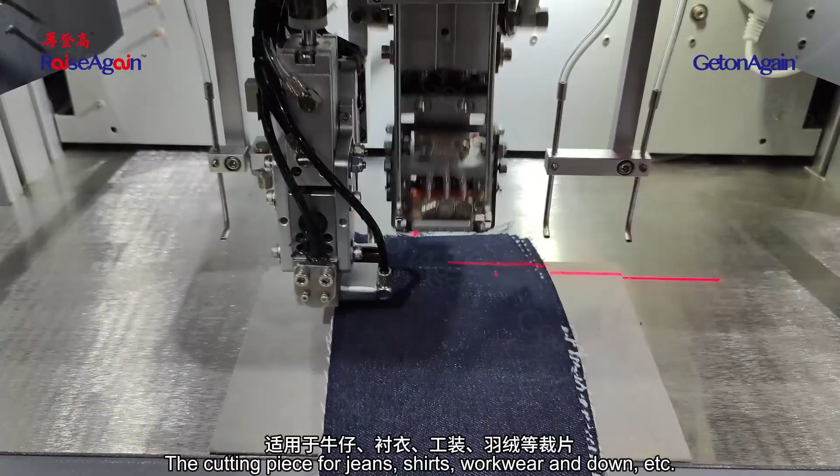Fully automatic winding machines. Post-finishing equipment includes the automatic folding and packaging machine, mainly composed of a folding device, rolling device, stacking and compress plus conveyor device. Folding device: after the quilt is detected and transported to the designated position by sensors, a robotic arm folds the quilt into a strip shape.

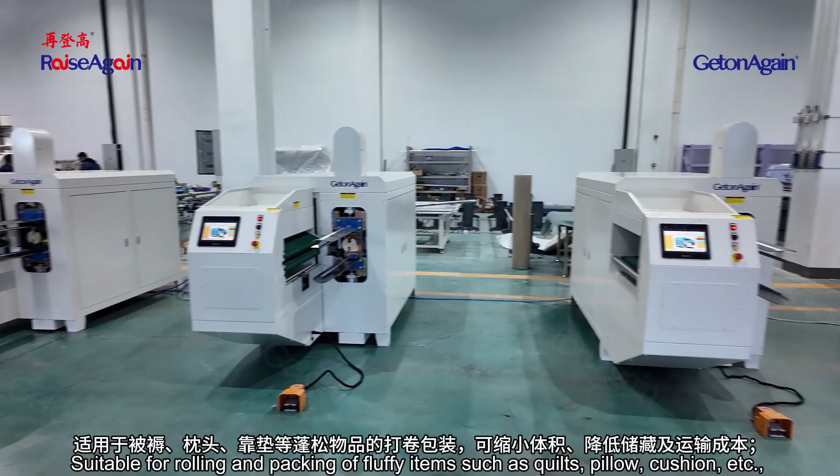After being detected by sensors, the strip-shaped quilt is transported to the designated position and folded into a block shape by a robotic arm. Rolling device: the strip-shaped quilt is transported to the automatic rolling device to complete the rolling process. Quilt roll packing machine, suitable for rolling and packing of fluffy items such as quilts, pillows, cushions, etc. to reduce the volume and storage, as well as lower transportation costs.

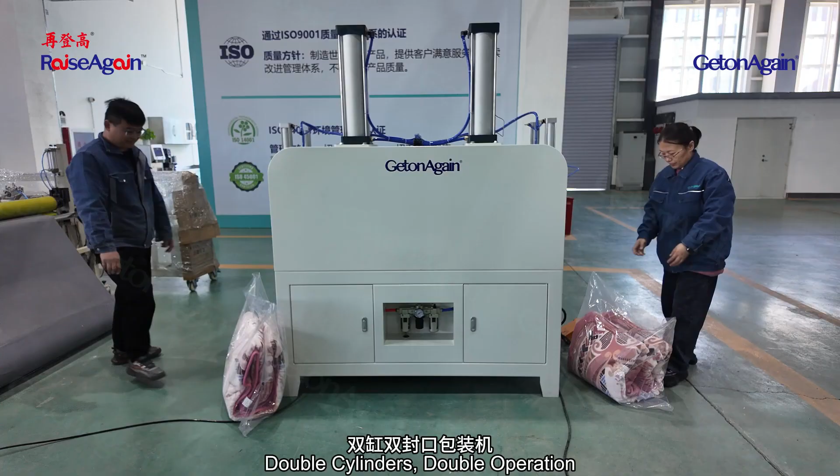The packing item is auto-fed from back to front by the belt during the compressing process and rolled to pack into the bag. Double cylinders, double operation, optional models. Double cylinders for double sealing and single cylinder for single sealing; the double cylinder design increases the compression pressure and area.

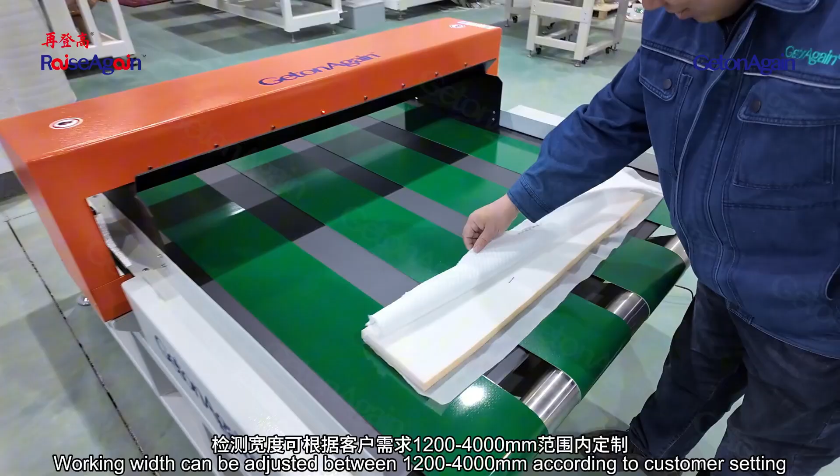Double seal design: two workers operate two products at the side of the machine, greatly improving work efficiency, suitable for compressed packing of pillows, cushions, bedding, plush toys and other products. Needle detector, applicable for large bulky products with ferromagnetic metal detection, for example bedding. Working width can be adjusted between 1,200 to 4,000 millimeters according to customer setting.

The flipping machine replaces manual operation with high efficiency, safety and reliability, suitable for the flipping and turning process of straps of various sizes and other products.

Collar corner trimming and turning machine efficiently trims excess seam allowance from collar corners. Upper cutting blade angle is adjustable. Simply change the lower blade to achieve different cutting angles. Equipped with a waste collection system for trimmed fabric edges. Pneumatically operated for superior collar turning results. Ideal for shirt collar turning processes.

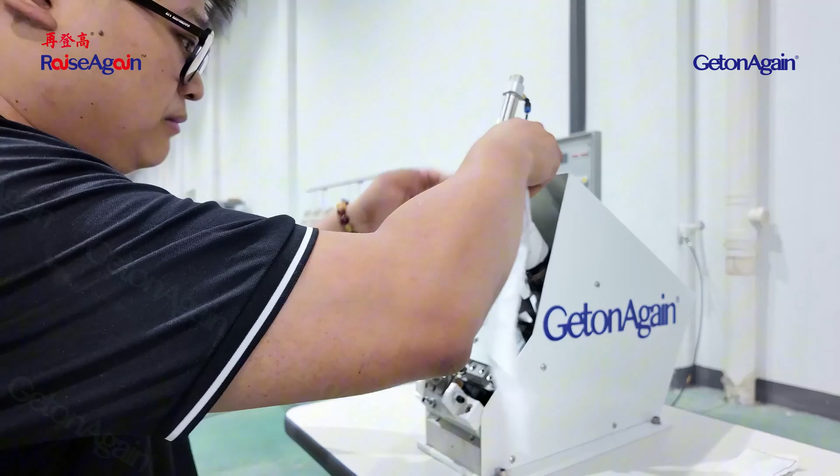Automatic folding and packaging machine GO ZD-BZD2: economical, small floor space, simple operation, standard folding effects, automatic transferring to next station in stacking mode. Two working modes, bagging and folding, are adjustable. Both folding width and length are adjustable within a certain range. For T-shirts, polo shirts, hoodies, thermal wear, pants and lightweight jackets, etc.

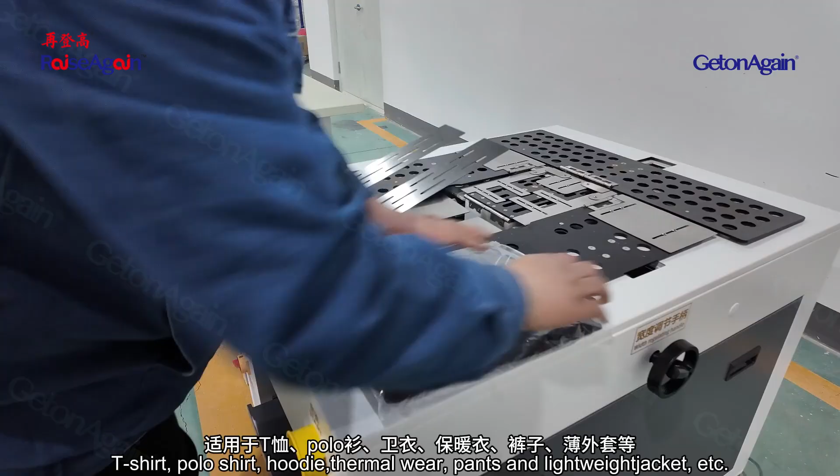Single and dual head cap pressing machine for baseball caps. Steam time, cap clamping time, steam output, and air consumption can all be automatically adjusted. A built-in steam generator with automatic water supply eliminates the need for an external boiler. Suitable for bulk order production needs. Using a robotic arm, it can automatically grip the cap. Simply place the cap on the mold to complete the pressing process.

Compression bagging machine: automatically compressing, with an air cylinder side-pushing the product for bag packing. Greatly improved work efficiency. The bagging is even. The electronic control program ensures consistency of product specification; finished packed product is flat and nice looking, saving packing volume. Compression stroke is adjustable to fulfill various packaging sizes. Machine mold tools can be customized according to actual requirements. Suitable for compression bag packing of pillows, cushions, bedding, etc.

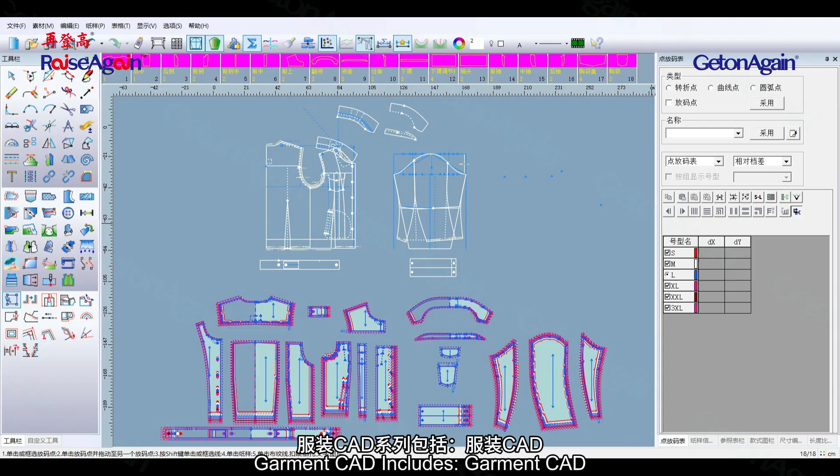Garment CAD includes Garment CAD, Super Nesting, Template CAD, Intelligent Tufting CAD, Wire Stitching CAD, Perforation and Embroidery CAD. In addition, GetonAgain has developed a digital operation and management system for industries such as garment processing and machinery manufacturing. This system helps customers improve production efficiency and management levels. Its features can be summarized as the 4 ones: 1 industrial enterprise, 1 technology platform, 1 data standard, and 1 operating system. It is the optimal choice for enterprises to achieve digital transformation and intelligent upgrading.

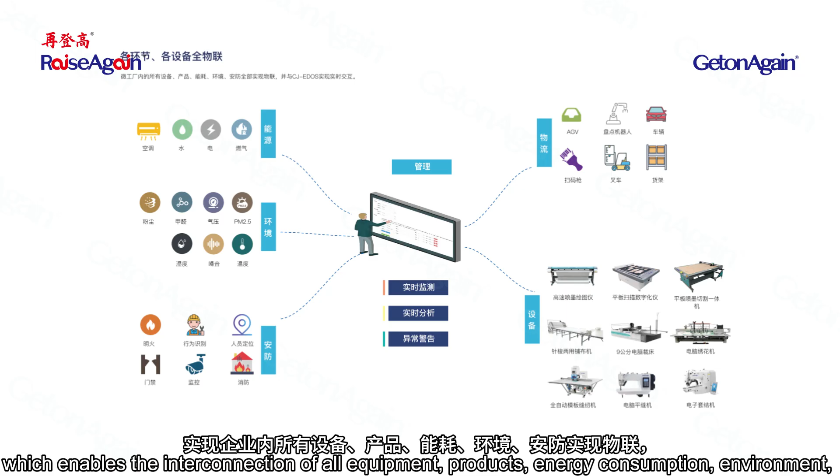Furthermore, by integrating Internet and IoT technologies, the company has developed an enterprise operating condition IoT management system, which enables the interconnection of all equipment, products, energy consumption, environment, and security within the enterprise. This system interacts seamlessly with the enterprise digital operation and management system, building a multifunctional integrated platform for enterprises. It enables functions such as data collection, real-time monitoring, data analysis, and remote management.